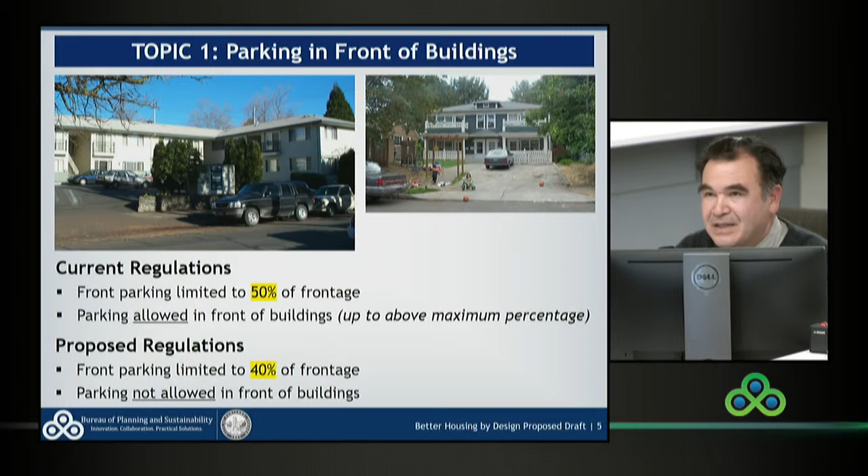The option we have for this is to continue preventing front parking arrangements in front of buildings on small sites, but on large sites providing some flexibility where there's not much visibility from the street, allowing buildings to be set behind that 40% of frontage area that's allowed to be parking.

This is another example showing a situation where you have buildings behind parking on a larger site. The 100-foot distance was chosen in relation to a common site configuration. In inner neighborhoods, usually sites are no more than 100 feet deep—it tends to be only southwest or eastern neighborhoods where sites are much deeper than 100 feet. But this would provide flexibility for some portions of buildings to be behind parking when set back further.

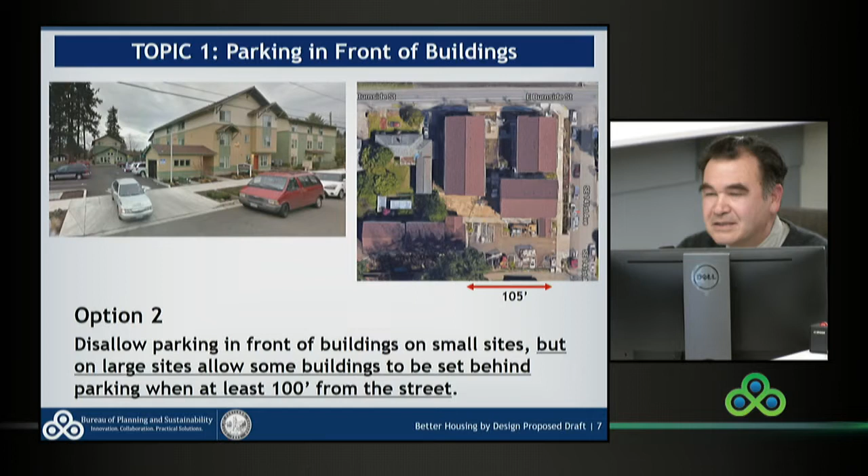Open to questions, but circling back to the basic options we have here, feel free to present other options. Option one is keeping to the proposal, not allowing vehicle areas between a building and a street. Option two keeps that disallowance for small sites, but on large sites, allows some buildings to be set behind the parking when at least 100 feet from the street frontage.

Bill, I have a question. Sure, Eli. So on option two, when you're allowing some buildings to be set behind the parking, would you regulate how wide that area is where you have the parking and that building set behind?

Yes. We have two kinds of limitations. One is that parking, at any rate, can't be more than 40% of the width of the frontage. So as the regulation stood, you could have parking to the side, but your buildings would generally have to be closer to the street. Option two would allow that 40% of the width of the site that's allowed to be parking, allowing buildings to be set behind the parking for just that 40% of the width of the site.

Okay, Eli, I saw your hand up. Thanks, Bill, for working through options on this. I'll toss out a third option: provide this limitation on 10,000 square foot sites or less, but on larger sites, rely on other ways of protecting visual impacts of parking. Looking at some of the examples you shared, once you have a big, deep site...

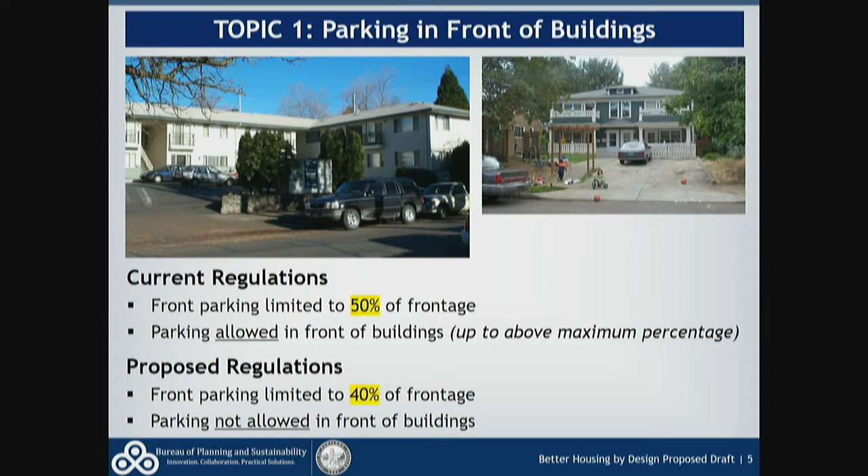So what do you do? Do you have to build a driveway along the side? I mean, assuming you want your off-street parking? You could have, for a fourplex, a driveway as narrow as 10 feet going to rear parking, or we had also decided for small sites up to 10,000 square feet, there would be no off-street parking. So there's an option to not provide off-street parking.

But assume you're in a part of town where this is the marketplace, I assume this is not in the inner city. That's your option. Are we talking about an expensive fix? We want to put parking. Do you have a driveway? What is it, have to move the building over? I mean, what would you do with that site where you felt the market really needed some off-street parking?

I'm guessing you would make a narrower building so that you can fit parking along the side of the building. I would almost suggest you hold that question for next meeting, because especially that example up there really gets at the crux and the overlap between RIP and this project, especially when we're looking at townhouses and duplexes and where you put that parking.

That's fine, I didn't have an outcome in mind, I was just curious. The way you solve for it is you've got to drive by the structure and either park along the side or park behind it. I'm trying to visualize that, I guess I'm not seeing it. We'll bring some examples back at the next meeting.

You have some similar issues with purely apartment type development. If you were to do an L-shaped development like here, you'd have to have the longer part of the L up by the street, and you'd have to have parking tucking back to the rear behind the building. That does require access to get back there.

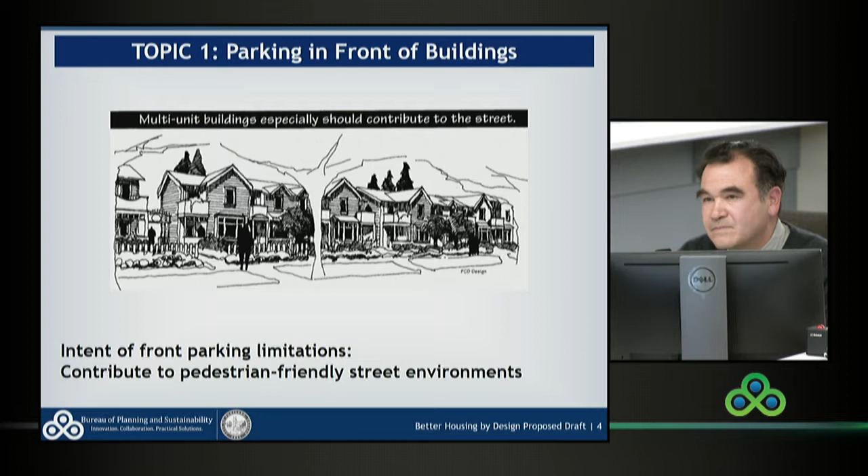Okay, are there any other questions or comments on this one? Are we ready to take a poll? Straw poll being — I guess perhaps let's start with disallowing parking in front of buildings on small sites. For those supportive of that concept, please raise your hand. 1, 2, 3, 4, 5, 6, 7, 8. All of us.

Just to clarify, was this to only limit the parking between a building and a street for small sites? Yep, that was where we're starting.

Okay, I guess then the next potential minor amendment to add on to that is, are we comfortable allowing accessory structures to be set behind that parking? Show of hands: 1, 2, 3, 4, 5, 8.

And then the next question is on large sites. I'll throw it out as we work through Eli's proposal, which is that we'll leave it at the only regulation being you're limited to 40% of the frontage, with no statement in the code on distance in front of buildings. So show of hands in support of that.

You're up, Teresa? That's 7. Looked like you were kind of debating. Sorry, so that's 7. Okay, all right, thank you.

Moving on to topic number 2, which is about side setbacks along corridors. The three options I have here are: 1, no change to the proposal, so even along corridors requiring 5-foot setbacks in the multi-dwelling zones and the setbacks that apply in the mixed-use zones next to residential — I'll get into that.

Number 2 would be changing the proposal so no side setback would be required where multi-dwelling zoning and mixed-use zoning meet, where they abut. Number 3 is the same as number 2, except in areas with an interspersed pattern where multi-dwelling zoning jumps back and forth to mixed-use zoning, requiring no side setbacks even between multi-dwelling zone properties in those zones. I'll have some graphics to clarify that.

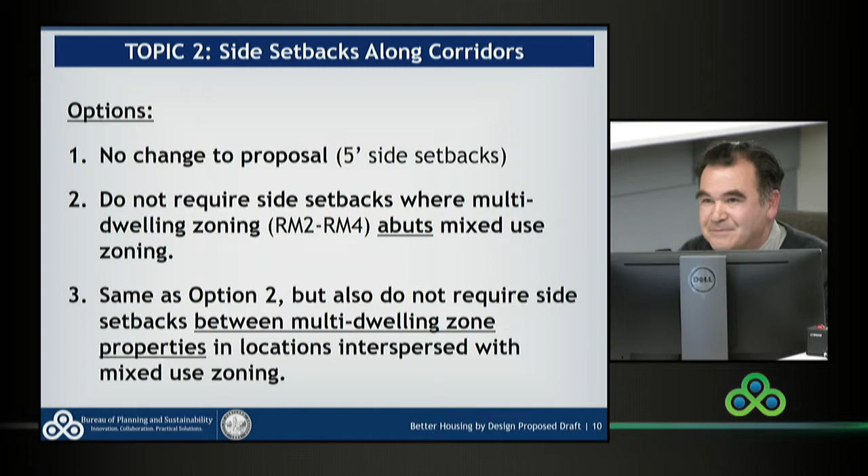Zooming in more closely, these show a couple of segments of Belmont — up by 37th and 39th, and then near 14th. Typically the R1 zoning applies to areas with an established pattern of residential buildings, and the mixed-use zoning sits at the intersections or commercial nodes in between. Over by 14th, a similar pattern — you're jumping back and forth between the CM2 and what will be the RM2.

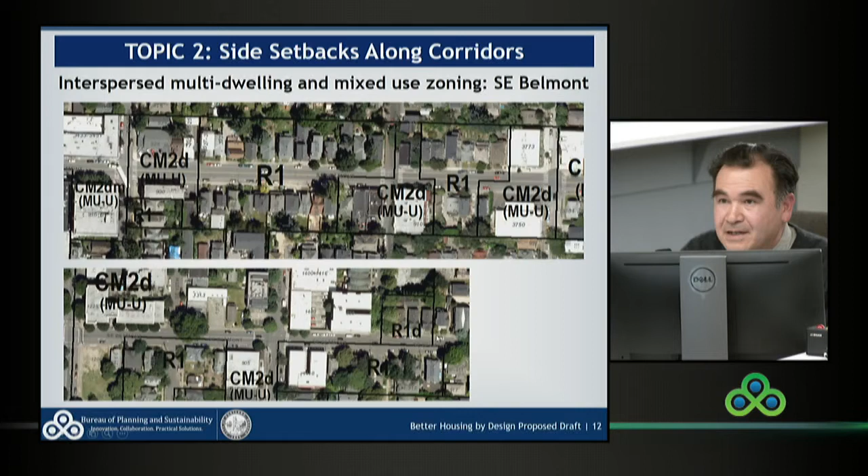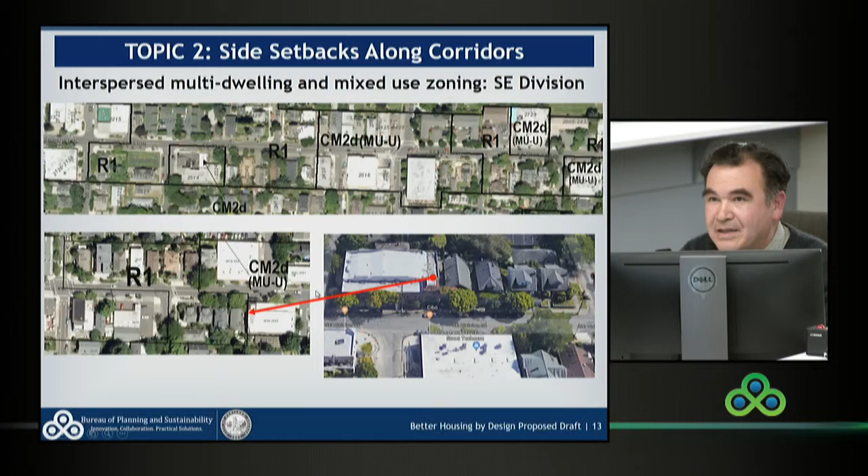Worth mentioning, there was a plan for this area in 2006, the Division Green Street Main Street plan, which talked about having different characteristics between the busy commercial nodes and the residential areas between them. What we have here now are illustrations showing different options for how we could approach this.

The current proposal is just the standard 5-foot setback from side property lines in the multi-dwelling zones. Currently, in the mixed-use zones, there's a requirement for a 10-foot setback between the property line that abuts residential zoning and the building. This applies whether it's single-family or multi-dwelling zoning, and it's intended to provide space for landscaping as a buffer.

It also provides opportunity for windows and some access to light and air. So the setbacks in the multi-dwelling zones are a bit of a continuation with what's already there, where typically you do have buildings with setbacks. That's the current proposal right now.

Side setbacks include the 10-foot setback between the mixed-use zone and residential zoning, and then 5-foot to the property line setbacks for multi-dwelling. Option 2 is allowing for no side setback where the multi-dwelling and mixed-use zones meet, allowing that join to happen there.

Option 3 was, especially in areas with the interspersed pattern, not requiring that setback where mixed use and multi-dwelling meet, but also within the multi-dwelling zoning, not requiring side setbacks on adjoining multi-dwelling zone properties in those areas. Just a couple issues to be aware of in these situations.

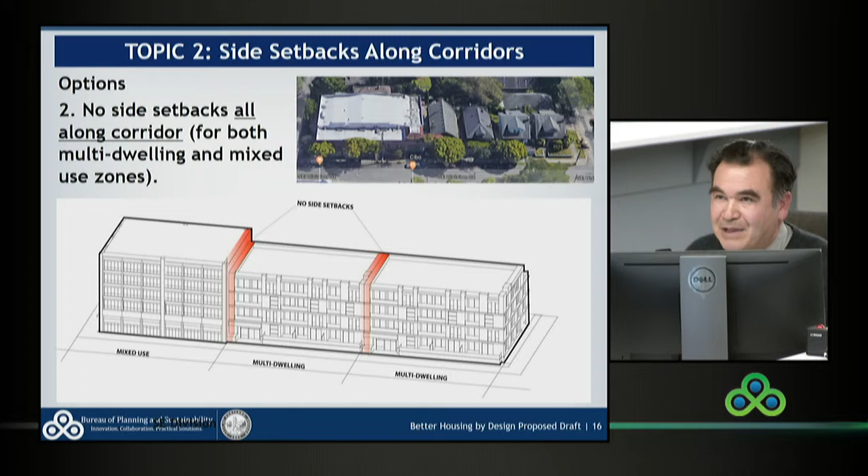There are also some community plans that talk about trying to keep some of that contrast between the residential, a bit more setback and green, and the mixed-use zoning. But anyway, I'll leave it to you for discussion.

Again, option one is no change to the proposals, keep the setbacks including where the mixed use and multi-dwelling zones meet. Number 2 is don't require a setback where the two types of zones meet. And 3 is no setbacks at all along those corridors, particularly where you have that interspersed pattern.

One issue is that if we elect to go for option 3, it could be problematic to describe in a clear and objective way what an interspersed pattern is. It could be described by being on the same block frontage or some distance from a mixed-use zoning.

BDS has registered some concern about options 2 and 3. They'd prefer a simpler code where your setback is 5 feet and always 5 feet, and it doesn't vary according to the adjacent zone or the kind of corridor location.

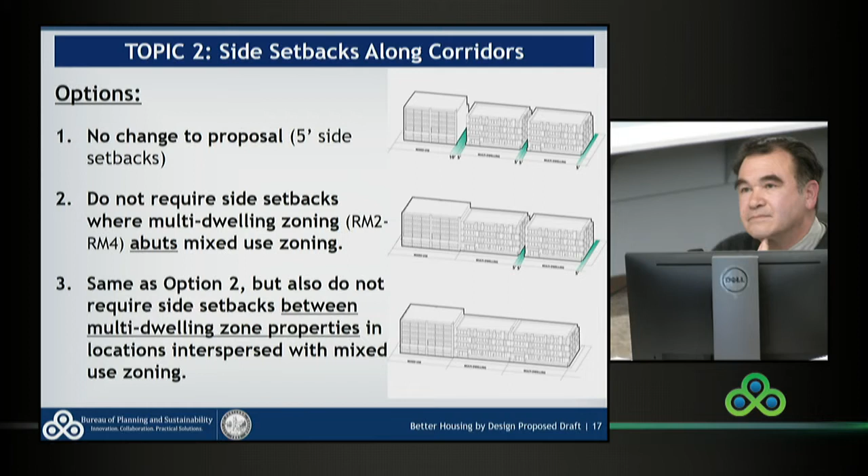Note that with option 2, it kicks in at the RM2 zone, what is today R2, because in our R1, the RM1 zone is the lower density with a softer edge to it. So we would keep that 5-foot setback requirement under option 2 for that lower density zone, the multi-dwelling zone.

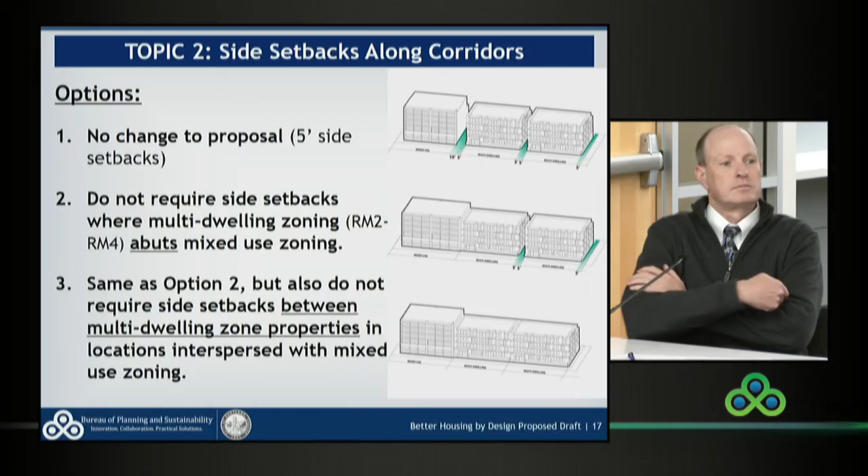In the inner neighborhoods, the zoning on these corridors, especially where you have the main street patterns, is very predominantly RM2. There's almost no RM1. The RM1, when it is on a corridor, is almost always in eastern Portland or southwest.

I'm seeing a series of hands up. I saw Chris's first and then Teresa. So a question and then a comment.

Question: for purposes of options 2 and 3, what defines a corridor? We were basing it on what are identified as civic and neighborhood corridors, and some of our mapping has shown that.

So that's most of the streets where you do have the multifamily and commercial zoning. Sandy and Chavez are both civic corridors, and then the 2-lane main streets like Alberta, Killingsworth, Division are neighborhood corridors. This would apply to both types of zones. This mapping, in at least inner southeast, is showing those types of corridors where we're looking at maybe having that apply.

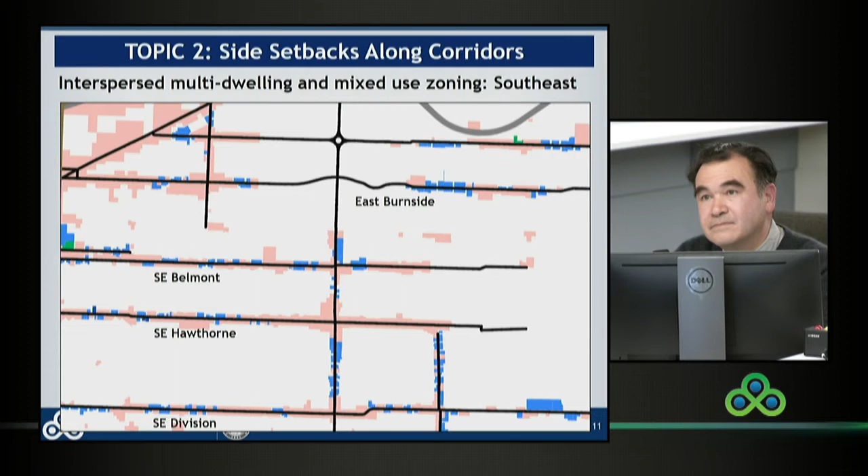So with option 3, I hear the concern about interspersed zoning. I guess I'll ask the question, why wouldn't you just say no side setbacks for RM2 and up in the corridors, and not worry about whether there was a commercial zone on the same block or not? That could be an option 4, regardless of location. If you're on these corridors, no side setbacks. I'd call it a simplification of option 3, but okay, thanks.

That would also apply. There are some stretches, like I think Killingsworth has got that, where you have multi-block stretches of multi-dwelling zoning and no mixed use, so there isn't much of a main street character to build on. It's mostly just houses. So that would be something to consider. 122nd has a fair amount of multi-dwelling zoning, so it would apply not just in those interspersed main street type areas, but a lot more range of types of corridors.

Teresa: okay, I have two questions. Can you put a driveway in those setbacks? That's my number one question. My number two question is, are there stormwater management concerns with something like option 3?

These would be allowances for zero side setbacks, but people could choose to provide a setback, including to provide space for a driveway. And BES encourages, or they tend to prefer, vegetated stormwater facilities, but it could very well be in the rear of the site.

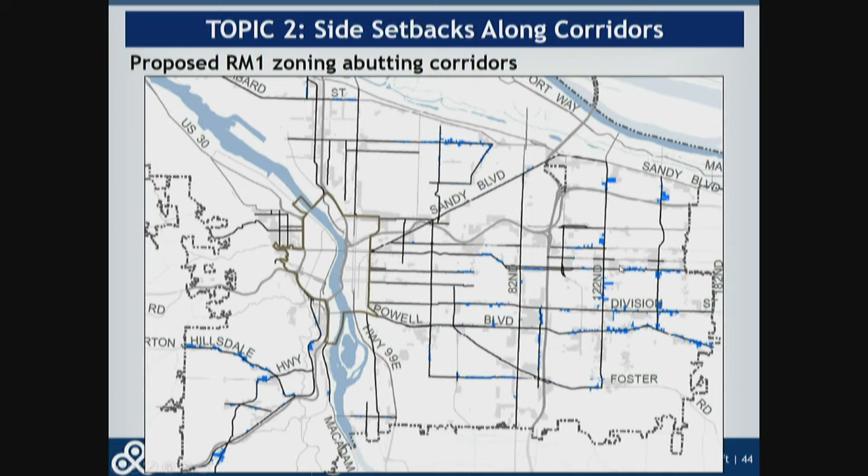Fair point about whether this is more of a mapping issue. If there's a sense that the whole corridor should allow zero side setbacks, is it ultimately a zoning issue? Is residential zoning more of an expectation that there are some setbacks and less high building coverage?

I don't think we have anything planned right now to revisit the zoning in all these places. So that's one thing to bear in mind.

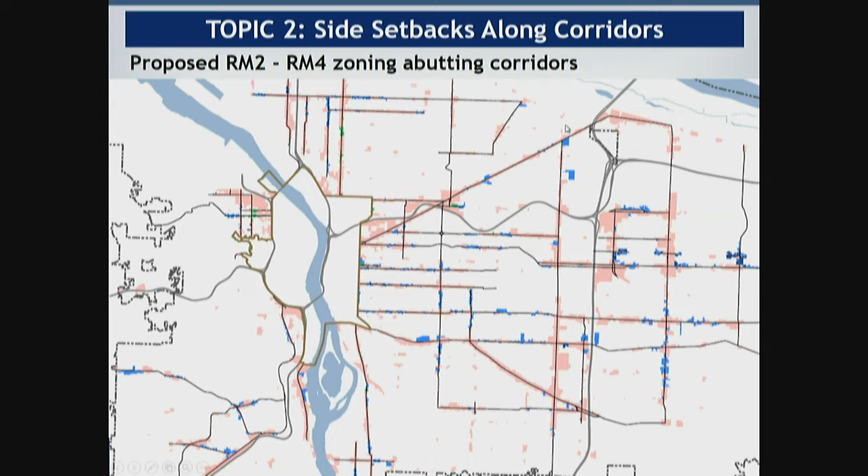Well, I guess the balance I'm getting is I like the intent of option 3. So my instinct is to maybe go for option 4, as Chris described. But I worry a little bit about some of these - although they might be labeled civic and neighborhood corridors, some of them feel like pretty long expanses of residential zoned areas where I'm not so sure I'm ready to say wherever a multi-dwelling hits another multi-dwelling, you can put up a blank wall.

So that's the balance I'm trying to get to, because I think there is some subtlety in which strips you pick. I really like the intent of 3, especially for neighborhoods that do feel like commercial mixed use, but for some reason there's not just one lot that's RM2 or RM3, but there's like 3 in a row. It seems weird to make it matter what your zoning is on both sides of you. Is there any chance that 3 could be written in a way that there is clear and objective criteria?

I think it would be possible. It could be based on proximity or block frontage. It does provide less certainty to people - they'd have to dig a bit deeper into the code to figure out what their setbacks are, because it would be varying according to proximity to mixed use zoning.

Okay, then my instinct would be to see if staff could do that, and that would be sort of a bridge to where we actually do a rezoning project.

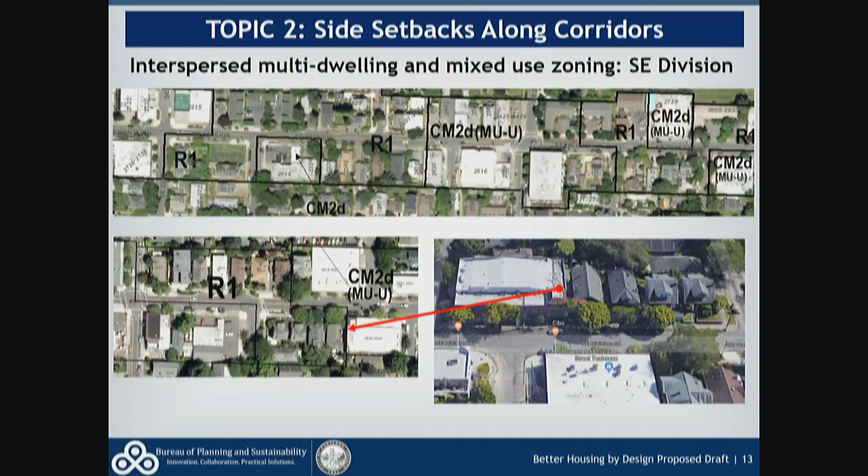Going back to Bill's massing, the interesting thing is that what you're seeing here today are single family homes, versus this is what's allowed—so you're going to get big buildings there. Potentially, in the future, it's going to happen. As that starts to happen, this is gone, right? It's gone away because it's redeveloped into this type of form.

What's the setback buying you now? What's it accomplishing? You've still got a series of long, large buildings along this street that you're walking by. In some ways, you could argue you're walking by and looking down this teeny little 10-foot corridor for 40 feet, and that's not buying you much, right? It's just a side yard, and it's not even really all that great to look at. It's like an alley.

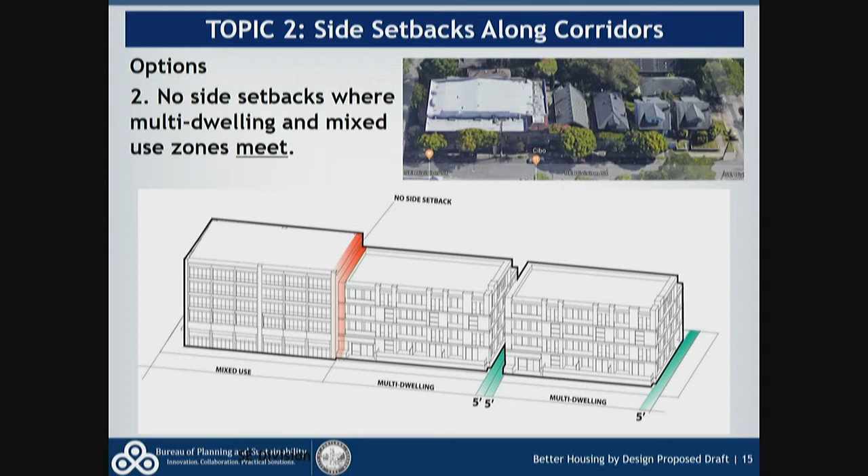Interesting—thank you, I appreciate this level of discussion. So, Chris, you had your hand up.

I did. I just can't help taking the opportunity to reflect that back during Task 5, prolific emailer Doug was jumping up and down at us about why we were leaving so much R1 on the corridors, and this shows he was seeing more clearly than we were where we were going to wind up at this point. So I have to give credit where it's due.

Okay, any other comments or questions on this before we move on? Let's take a straw poll. Okay, I'm not seeing anything, so—sorry, I'm just trying to figure out where to start here. I think...

Maybe just start with—sorry, what did you throw out there, Chris, as option 4? Option 4 would not require the interspersed commercial to allow the 0 setback. I don't know, I think Eli may have talked me out of it—I'm not strongly committed to it. Okay, now you threw me.

So let's start maybe with option 3 and just get a straw poll. Doesn't mean you can't vote more than once—let's just kind of figure out how to start somewhere here. So this would be option 3: do not require the side setbacks between multi-dwelling zone properties and your mixed-use properties at interspersed mixed-use zoning locations.

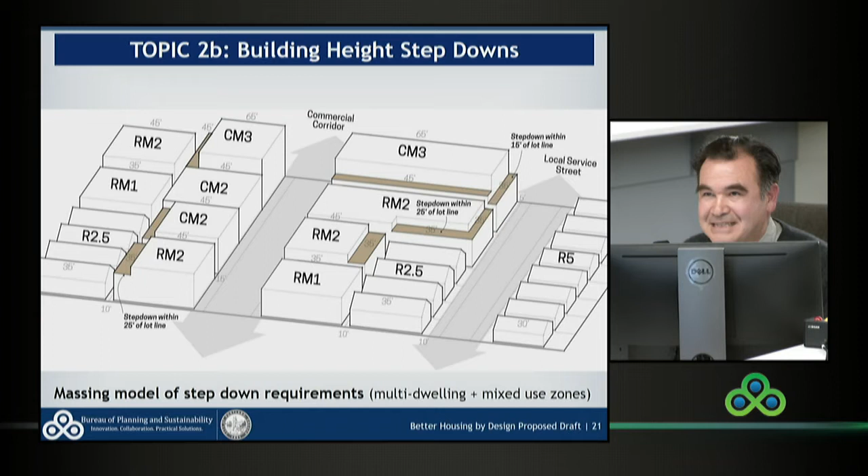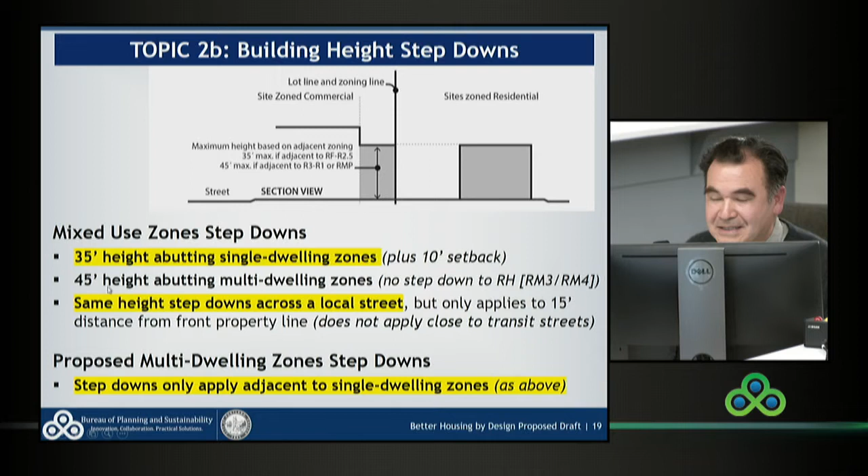One thing I should mention is, despite the complexity, it's actually a simplification of what we have in our design overlay zone. Our community design standards require the height to step down to the same height allowed in the adjacent zone. There was a simplification here in that the height step down is 35 feet when you're adjacent to single dwelling zoning, regardless of whether it's R5 or R2.5. Currently in the D overlay, you step down to 30 feet if it's next to R5 and 35 feet if it's next to R2.5. Same thing with the multi-dwelling zoning step down — it's currently in the D overlay, you step down to the exact height of the zone.

It's complex. One thing to be aware of with the multi-dwelling zones is a lot of the multi-dwelling zoning is in a district sort of format, such as the center neighborhood area near 60th and the Gateway district. So you don't have as much adjacency. You do have in the dark blue some areas that do abut single dwelling zoning, and it's about 30% of the RM2 zoning that abuts single dwelling zoning.

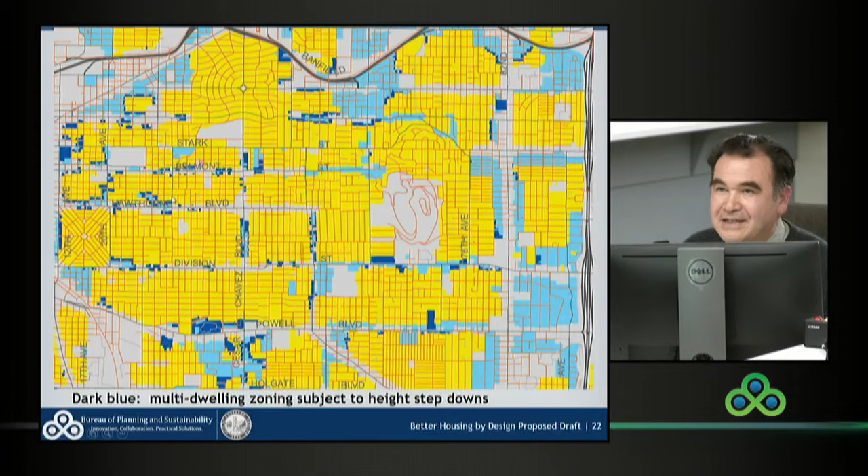One other thing to mention: part of the compromise with the step down was many neighbors were saying that the step down shouldn't be to the allowed height of the adjacent zone, it should be to the existing height of an existing building. Their take was, if it's a 2-story building, you should step down to 2 stories. Where staff landed with mixed use, and as we're proposing here, it's to that more standard 35-foot height adjacent to single dwelling zoning.

So we didn't have a specific proposal for a change to this, but I did want to share the proposal and clarify, at least when it's possible, given it's a fairly complex topic.

Thanks, Bill. I appreciate especially your scale graphic. I think that was very helpful. I know that was probably torturous to do. Going back to it, you now are going to get a proposal.

Can I ask a question? You want to see that? Can you go back to your existing house next to the? Oh, can you tell us what the number? What's the setback? What's the height? What are we looking at there in terms of?

This is showing a mixed use zone. So there's a 35-foot height limit here, and that applies to a 25-foot distance from the property line. So you max out at 35 feet. 10 feet of setback, and then 15 and a 10-foot setback. And there's a requirement for tall landscape screening, so shrubs are at least 6 feet tall, with a 10-foot distance here.

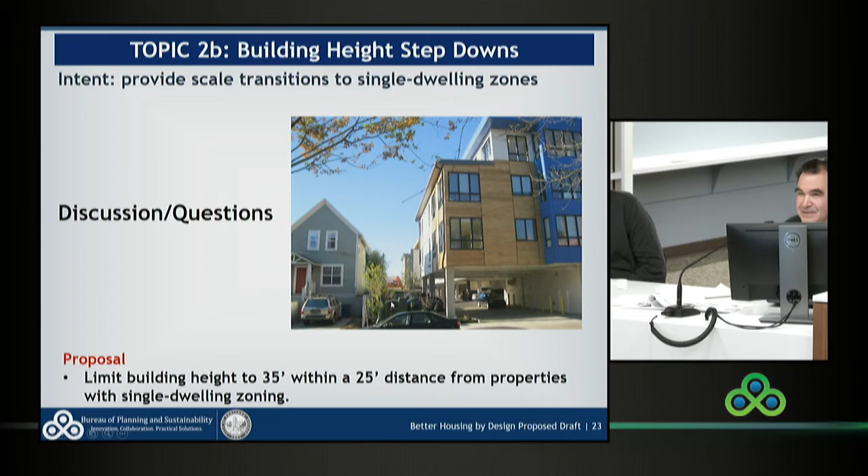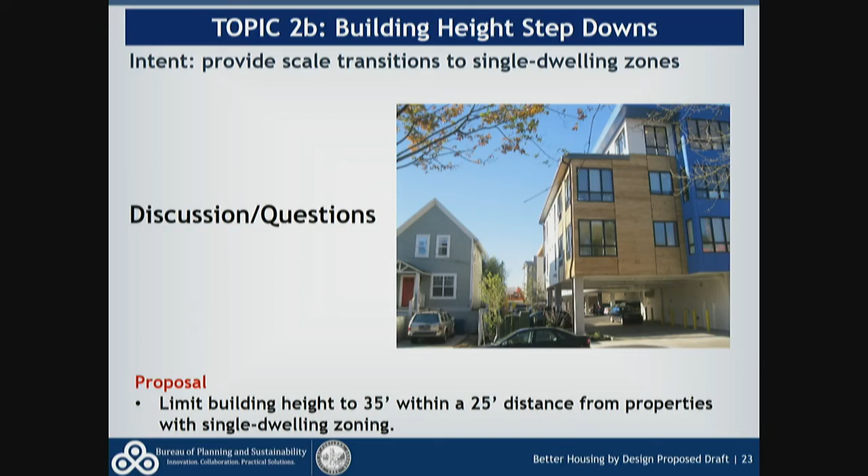For the multi-dwelling zones, it's a little bit different. It's the same 35-foot height limit next to single family, but there's only a 5-foot setback versus the 10 you have in the mixed-use zones. But it's still 25 feet for the stepped down portion, limited to 35 feet for that 25-foot distance. So in a multi-dwelling zone, that lower portion could come out 5 more feet.

We've heard from some housing providers that the 3-story scale is especially cost efficient, so they especially wanted to make sure that 3-story buildings aren't having to cut a notch off of their top. So allowing a 5-foot setback simplifies things to some extent for at least 3-story buildings.

Any other questions? If not, if you could go back, thank you. And explain to me what we're accomplishing with the step down between the CM3 and the RM2. I don't get it. That's transitions in scale.

Part of it was taking existing regulations, again, we had in the design overlay, and trying to simplify it to some extent. So it was taking a precedent where there's already a requirement: if you have a large scale zone, you need to step down in scale to an adjoining smaller scale zone.

So for what it's worth to my fellow commissioners, I'm not a big fan of step downs, you've all heard it. I'm not going to refight the battle about commercial zones and residential zone step downs, but I don't think that a 20-foot difference between a 45-foot building in the RM2 zone next to a CM3 building is worth the complexity that adds to the structure of the CM3 in the transition story. In my opinion, you've got two very large commercial feeling buildings next to each other.

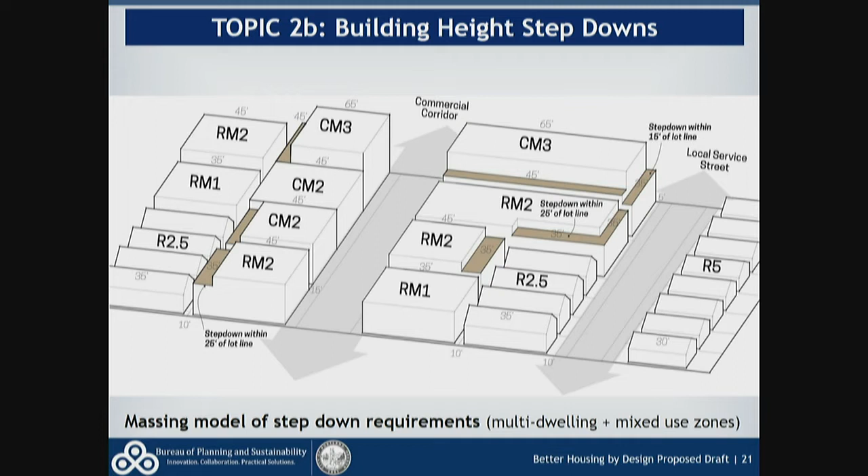Yes, we've nudged our way into the mixed use zone, and we can do it a little further, and do some outreach before it gets to council. One thing I should mention is that for the multi-dwelling zones, the big scale RM3 and RM4 zones that allow similar height to CM3, we did not propose a step down to either the mixed use or lower scale multi-dwelling zones. So there's one area where it's departing a little bit between the two types of zones.

Okay, Eli? There was one more item in this graph - the RM2 across the street from the R5. That also seemed like one where I wasn't convinced that's a setback - that we need a step down situation. Step down, thank you.

I mean, it feels like if you're going to 45 feet high, you're doing wood. I think that in practice at RM2, maybe I'm wrong, someone would just pull the whole building back to 15 feet, which would make it further from the street. I'm interested if you think that's what would happen, especially with the lot coverage limits.

Yeah, they might do that. We put this step down to be consistent with the mixed-use zones. The general concept was for zones that allow similar scale or height buildings in mixed-use and multi-dwelling, if the goal is to step down in scale, apply the same standard. So if a 4-story mixed-use zone is across a local street from a single dwelling zone and it's stepping down to 35 feet, the idea is a 4-story multi-dwelling zone should do the same thing

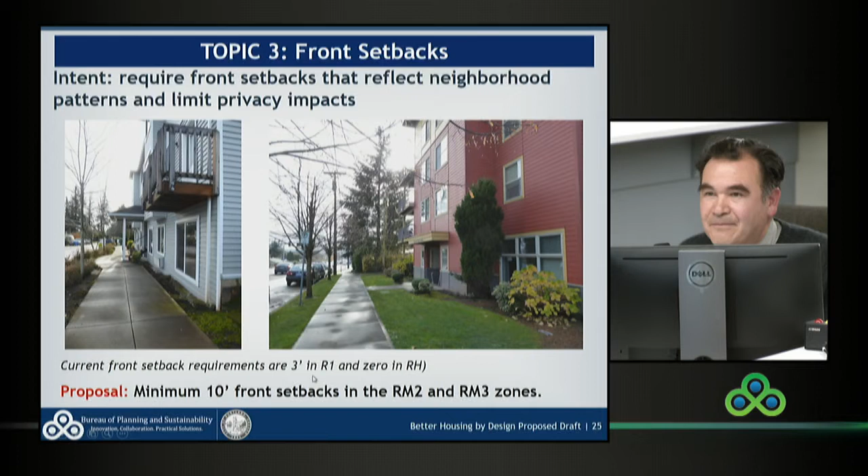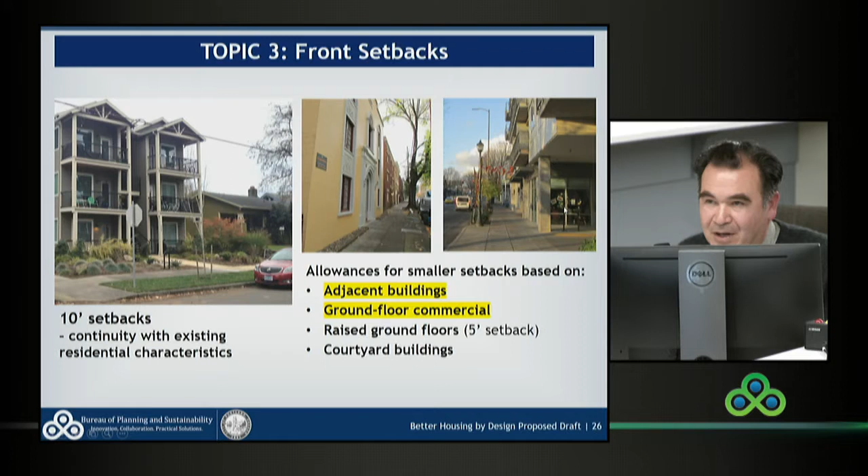The proposal is generally to require a 10-foot front setback, but to provide some allowances for reduced setbacks based on certain situations. If you have adjacent buildings with smaller setbacks, you can continue that pattern and match those setbacks. If you're doing ground floor commercial, you could build right up to the sidewalk. Also, if you're raising the ground floor 2 feet above sidewalk level, you'd be able to reduce it to a 5-foot setback.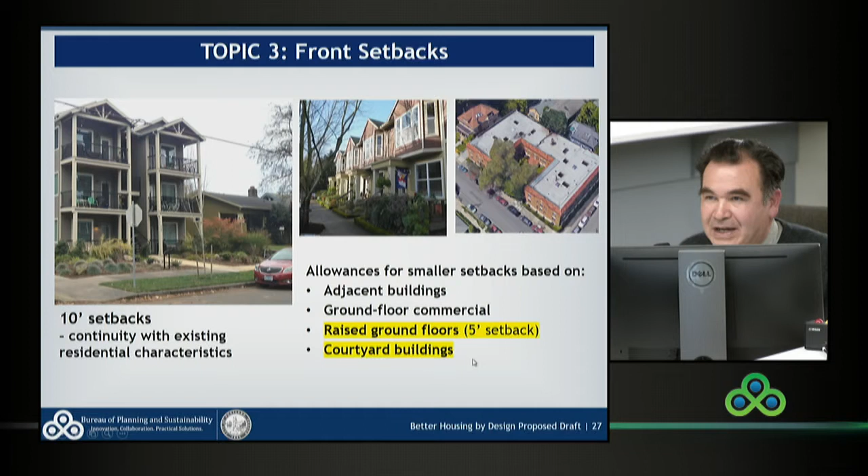And there's also an option: if you have courtyards open to the street, providing a big chunk of green, the building wings would be able to go right up close to the sidewalk. So the general base is a 10-foot setback, but with specific situations providing lesser setbacks.

Also, when looking at other cities and how they regulate multi-dwelling zones, Vancouver BC was one place we looked at. They have a very established approach where their mixed-use commercial zones are intended to be hardscape right up to the sidewalk, but even their higher density multi-dwelling zones see more of a green edge. Part of it is keeping the characteristics of some of the residential zones and areas.

But that circles us back to the question that there are advantages to 5-foot setbacks. One criticism we had in testimony was that front setback area is not the most usable for people. On the other hand, providing more than a 5-foot setback does provide space for small trees and elements that could green up the street environment and help reduce urban heat island effects. At any rate, the options we're suggesting are to keep the 10-foot front setback with those options for reduced setbacks, or to reduce the standard setback to 5 feet.

Teresa, I have a question. Are planting strips, sidewalk planting strips required? So there would be a space for a tree or not? Typically, PBOT street standards do require this furnishing zone where you have the street trees located, which would be independent from what happens on the private property side.

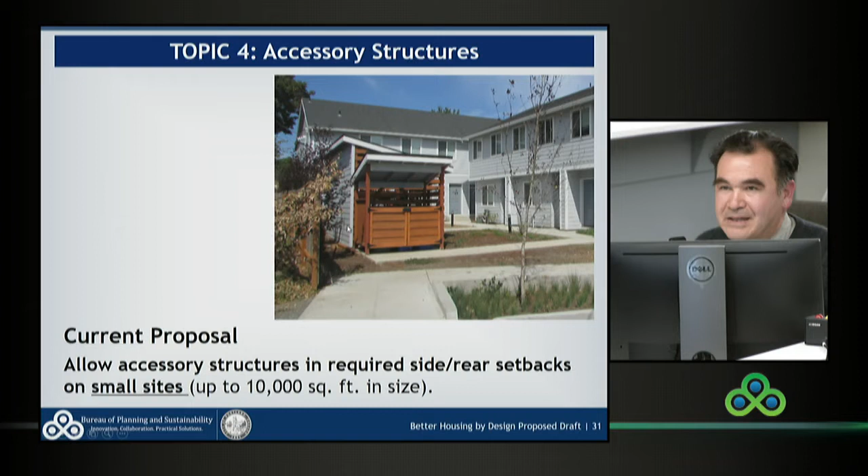So you wouldn't have to have this little setback from the property line. And the proposal would be to also allow that on larger sites, more than 10,000 square feet. Related to the height, just to clarify the way height is regulated, and these are mostly existing standards.

There are limitations for when you're building these accessory structures in required setbacks where they can't be more than 15 feet. And then for sites where they're just houses, duplex or attached houses, accessory structures are limited to 20 feet, even when outside of that setback area. Currently, for multi-dwelling development, apartment buildings, fourplexes, what have you, the base height applies to accessory structures that are not in the required setbacks. So theoretically, they could be 35 feet in the RM1 zone or 45 feet in the RM2 zone. We haven't really seen accessory structures built to those heights.

Staff's not sure if there's a good reason to put in that regulation, limiting the height to 20 feet, until it's been proven that it's a real problem. A couple things we brainstormed that could be accessory structures that could run afoul of a 20-foot height limit for multi-dwelling development: if you're doing a structured parking building that's separate from the residential building, that would be subject to it. Or if you're doing a large community building that's more than one story, you could run into issues with a 20-foot height limit.

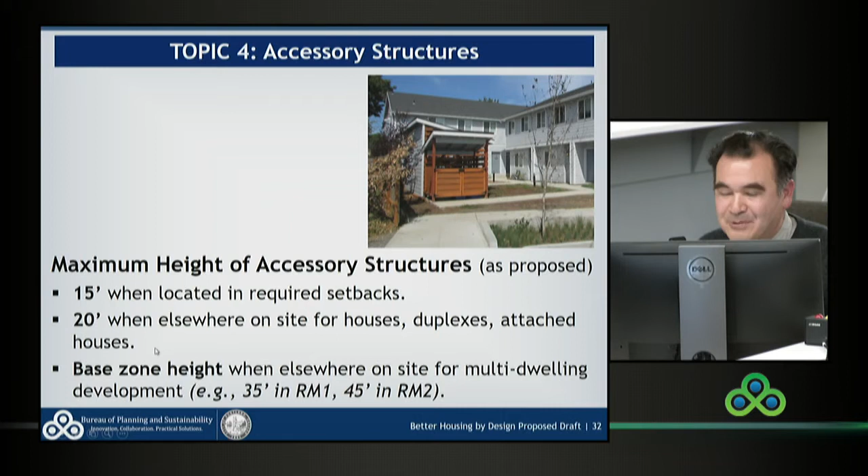But anyway, that's related to option 3. So again, the options are: no change to the proposal, only allow accessory structures in required setbacks on small sites. We did run some numbers, and about 80% of properties are 10,000 square feet or smaller. Option 2 would be to allow accessory structures in required setbacks regardless of site size.

And then option 3, again, it could apply to either. It would be to limit accessory structures outside of the setbacks to 20 feet instead of the usual base height limit.

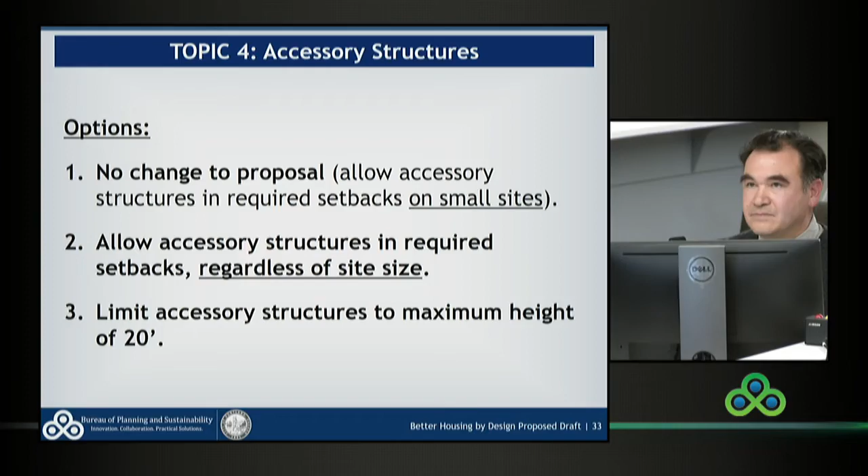Great. Okay, any comments, questions? Chris? A few questions. You mentioned ADUs. Are ADUs permissible in all multi-dwelling zones? Yes, although by definition they're accessory to a house, and I think they're soon to be duplexes.

So you cannot have something officially designated an ADU if it's secondary to a fourplex. It's only by definition they're secondary to single family type development. Okay.

And number 2 and number 3 are really completely separate proposals, right? I don't think I favor number 3. Number 2,

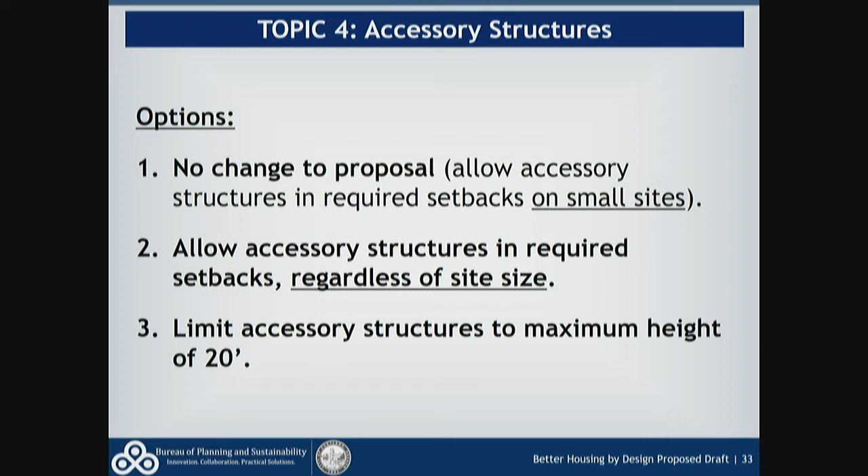is there a height limit in the setback separate from the overall height limit? Yes, within required setbacks. So like if you're building within that 5-foot side or rear setback, your height is limited to 15 feet. And there's also a limit on the footprint. Buildings can't be more than 24 by 24 feet in dimension.

Okay, so I think I support number 2 with those limits, and I don't support number 3. Any other? Eli?

So this was, I was started on the accessory structures code update long before I joined this body. So it probably ended up with you at some point along the way. But the compromise through that was to say there was a time when you could have garages up to a certain size right up against the property line, but you couldn't put an accessory dwelling unit of the same size in that same location. And through that code update, we said it doesn't matter what happens inside there; it's how big the structure is.

So it's important, I think, on one end too, to point out these are not just any accessory structures; these are scaled down ones that the city felt okay to put right against the property line in the single family zone context of that code update.

So what I'm hoping is that we take that same logic and apply it to this zone too. Some detached accessory structures, if it's outside the setback, there's this whole set of rules for those. They could be taller or whatever, but if it's inside the setback, as long as it's no more than 24 feet long, no more than 600 square feet, no more than 15 feet high, it's okay to be against the property line.

And so that's my thinking is that let's just allow it in this zone also. And this zone does tend to have larger sites. If you have a site, I don't know that it makes sense distinguishing it, just allowing it be up against the property line as long as it's small. Doesn't seem any more of an impediment on the neighbor.

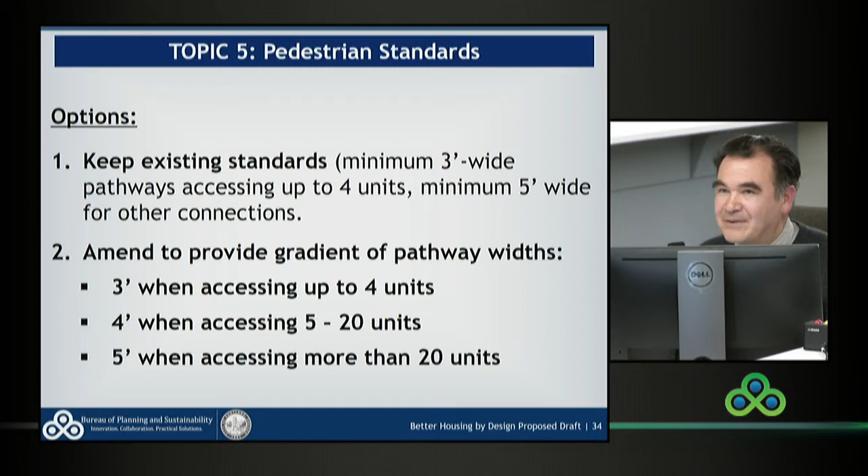And sorry, I don't have images for this one. Thank you, Bill. Any comments, questions, Chris?

So what's the policy rationale here? Is it the idea that if there are more units, there'll just be more people passing each other, or that with more units you have more likelihood of somebody with a mobility device? I think it's generally more units means more pass-by situations you want to accommodate.

I should mention that the mixed-use zones have a 6-foot requirement for serving more than 4 units. Actually, I probably shouldn't have said anything about that. But it just seems like you either have a single lane path or a double lane path, and I don't know why you'd have so many variations in between. It seems a little odd to me.

Yeah, Eli? Well, I pitched this one too — thank you guys for bearing with this. I've done developments with multi-unit buildings, and 5 feet just feels like a wide path, a lot of concrete in a multi-dwelling development. And then once you have to do some ramping in certain situations, it's a wider ramp you're building. So my original proposal here was actually just to make it 4 feet in general if you're serving more than 4 units.

But then Bill brought up, well, what if you have a 4 or 5 story building? That's getting pretty narrow at 4 feet in that situation. So I said, okay, good point, maybe some of them need to be wider. I still think that if you're doing a 20-unit development on a larger site, having lots of 5-foot paths as your general path width is just a lot of concrete. I'd rather not have to make paths that wide, and I don't think it serves a big benefit in those situations.

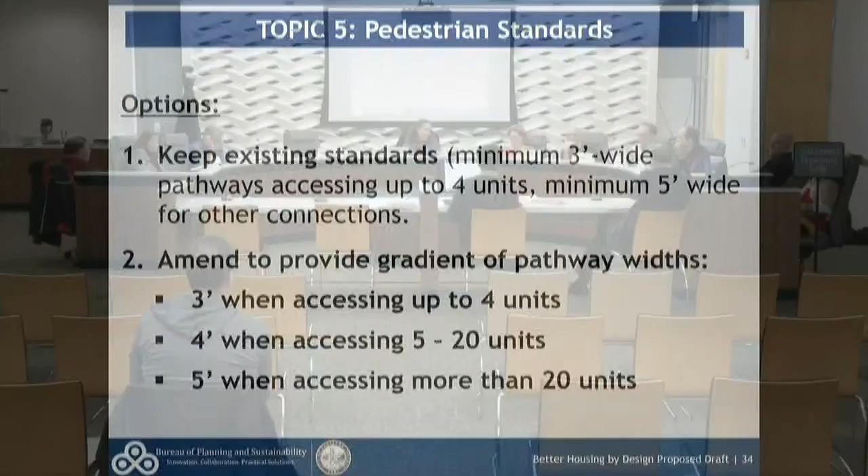It feels 5 feet wide - that's just wide, it's a long way. About as big as me, maybe a little shorter. If you lie down across it, you could be on the concrete the whole way.

Yes, it is really gracious - I'll give you that, I think.

So Eli, I'd rather landscape it - were you arguing for 3 feet to 4 feet? I'm arguing to keep the current standard of 3 feet if you're serving up to 4 units. And if you're serving more than 4 units, instead of jumping to 5, you could jump to 4. That was my original proposal, which I'd support.

So why don't we take a show of hands on number 1? Quick question first - is the 5 foot standard adjustable or fixed? It's adjustable, I believe. So if Eli can make the case that a 4 foot path serves the need adequately and gets more grass, less impervious surface, he can try to make that case - but it is a land use procedure, an adjustment to the zoning code standards.

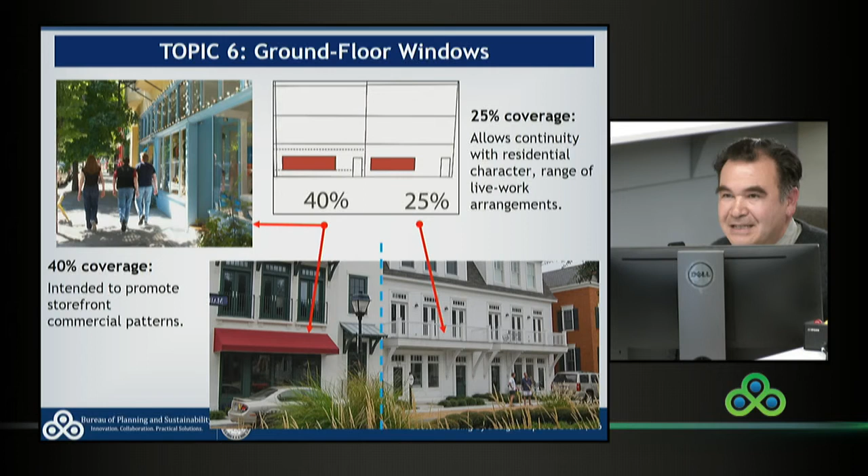Typically, 40% is applied on primary corridors, intended to promote storefront commercial patterns with a fairly high amount of window coverage. The original intent of 25% was to provide a lesser amount of window coverage, since there's less of a storefront commercial aspect in residential zones - it provides more flexibility for a range of live-work arrangements that don't necessarily have large storefront windows. Examples include townhouse-type development converted or built as live-work arrangements, not full-fledged storefront window coverage.

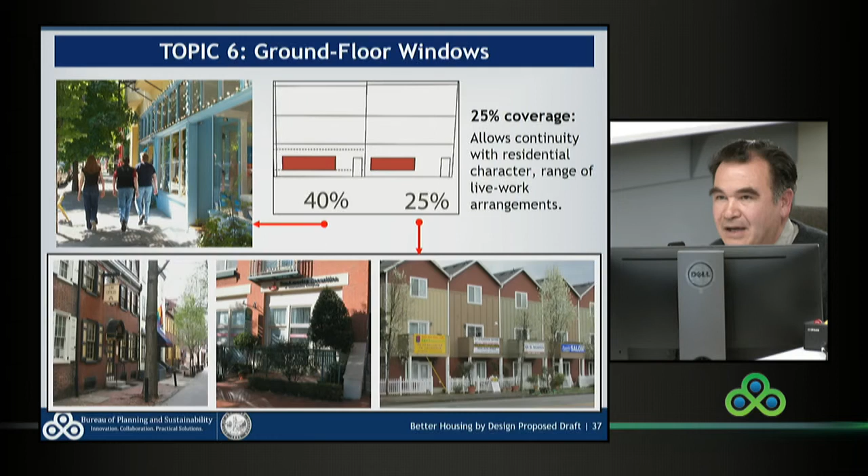So part of the idea is that allowing 25% if you're at least 5 feet from the sidewalk provides flexibility for live-work approaches. The 40% requirement has precedent in what's been built in the RH zone along Martin Luther King Boulevard, where you have ground floor commercial, and in Northwest on Lovejoy - both RH zoning with commercial built right up to the sidewalk, with a lot of glazing. This would be consistent with the idea that if you build right by the sidewalk, you should build to more of a storefront commercial window coverage arrangement.

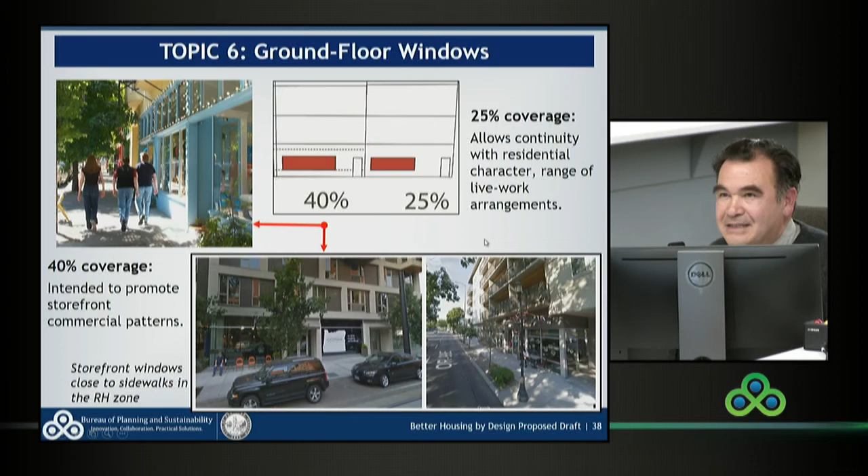The idea is you would allow lesser coverage for buildings set back further from the sidewalk. This comes from staff, and there are options. You could keep the current 25% window coverage requirement for ground floor commercial, but our preferred proposal is to shift it so that if you're building within 5 feet of the sidewalk, it becomes a 40% ground floor window coverage requirement, while providing flexibility for situations further set back to continue more of that residential character with a smaller window coverage requirement.

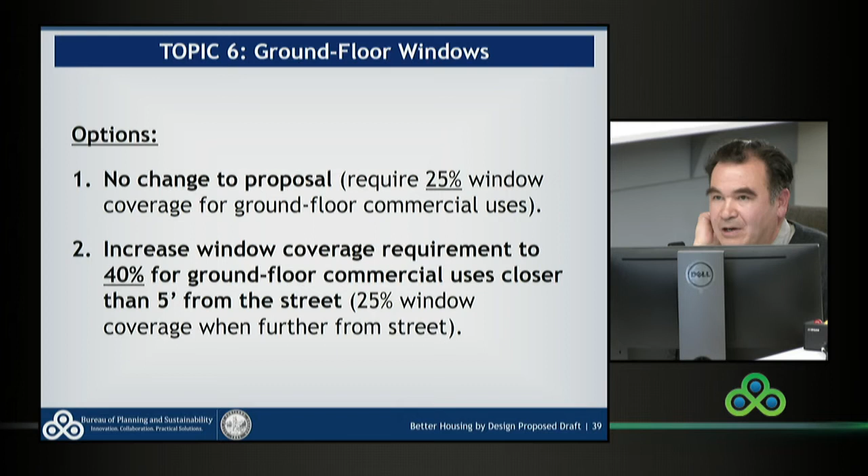Comments, questions? Teresa's hand is up. So, to the architects in the room, if you were building for commercial use, would you not put windows in there just for building functionality?

I think the struggle comes down to, on an apartment building with limited frontage, we start struggling with all the requirements for utilities and lobbies. Lobbies could have a lot of glass, but you're also trying to make it unique, and then there's the bike room, and there's kind of a mail room. You're trying to get all that into the ground floor, so it starts competing for window coverage. If your primary usage is for people living there, you want to use those spaces optimized for people. If you're building for commercial use, and your intent is to rent it as storefront, then you're going to put windows in. So wouldn't the functionality of the building be a better dictator of what the window coverage needs to be?

Yes, it just means you could get a building very close to the street, which I think is what staff's worried about, that has very few windows in it. Throughout our code we've been trying to encourage architects and developers - having that window requirement encourages you to maybe put retail there or uses that are more pedestrian friendly, versus things like bike rooms or mail rooms that aren't that sexy. Loading is another one - if you need an area to load furniture into an apartment building, you're trying to encourage people not to do that on the front facade and find a creative solution. So I guess I'd support option 2, since it sticks with continuity of our other code, yet gives you a break for situations that are maybe all residential where you don't want quite as much window.

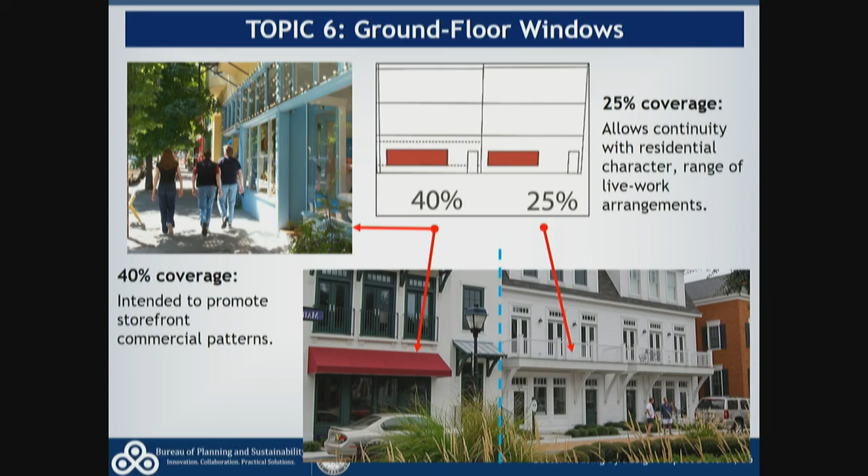Okay, I think that's okay. It was a little bit different than we'd originally looked at, but I'm not seeing anything that bothers me too much.

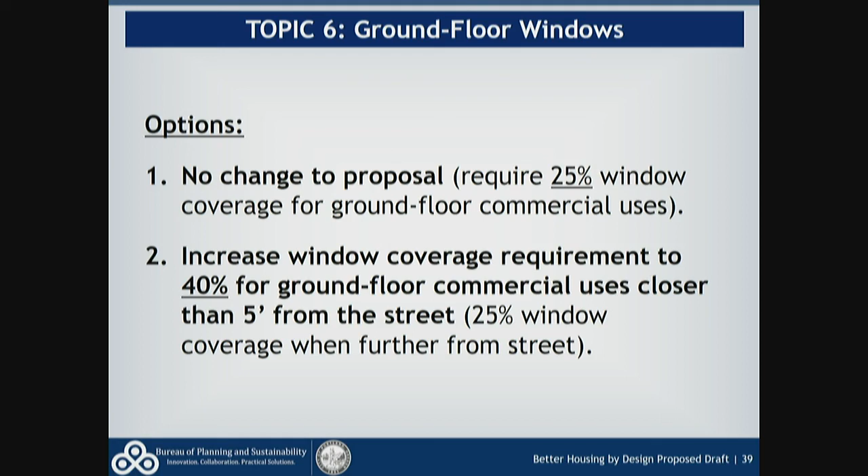Okay, so if we could see our choices again - I think I'm hearing support for staff's proposal, which is item 2: increase window coverage requirements to 40% for ground floor commercial uses closer than 5 feet from the street. Hands up if you support that. You've got 8, that passes.